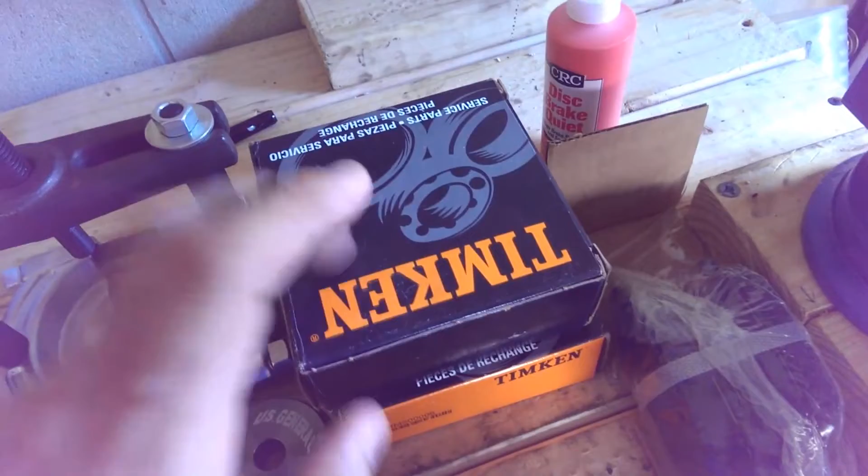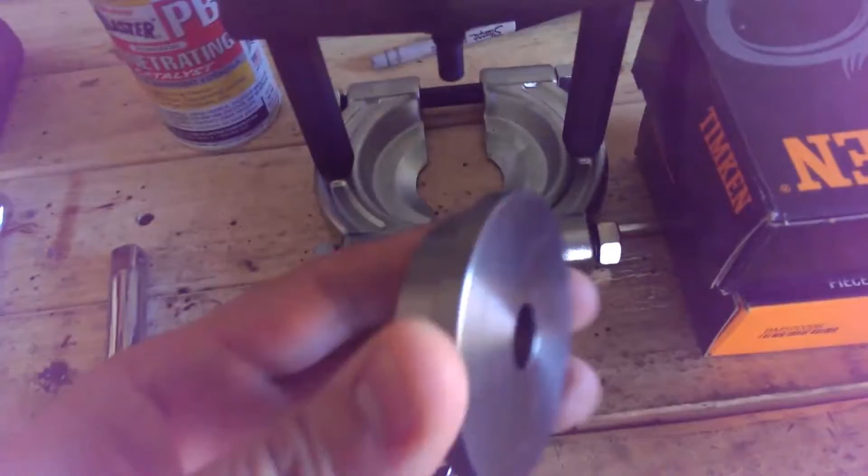I have a couple tools that you will probably need. Obviously brakes, bearings, some disc brake quiet, or any type of fluid you want to use to quiet the brakes. I bought these at Harbor Freight. You have two things: your bearing separator, which is this baby right here, which you can build or buy - I bought it because fuck it, right? I also got these guys, which are basically bearing pushers, which I'm gonna use as a backing plate for the bearings. There's also one more that I need to get from there.

You're gonna need a couple other tools. My friend Joey lent me the torque gun, so this is gonna help me a lot since I don't have one. You're gonna need wrenches and spanners and all that stuff, which I don't have them all here. You're probably gonna need a dead blow hammer or something like that, some wood chocks, and obviously this, which is the manual.

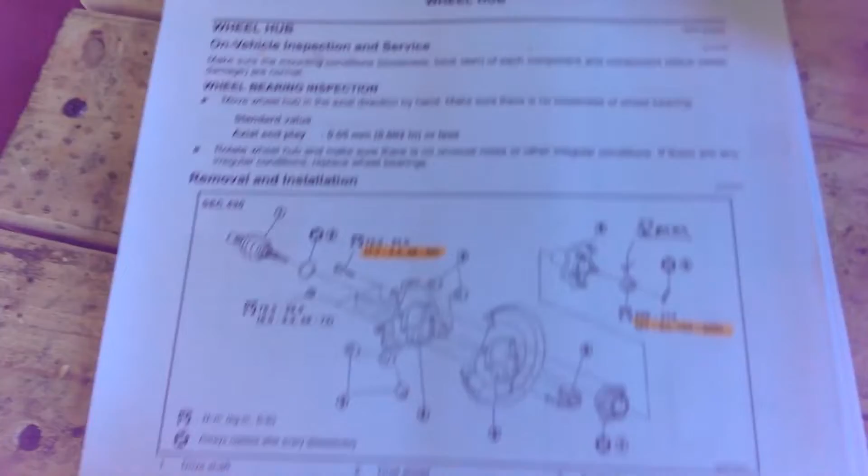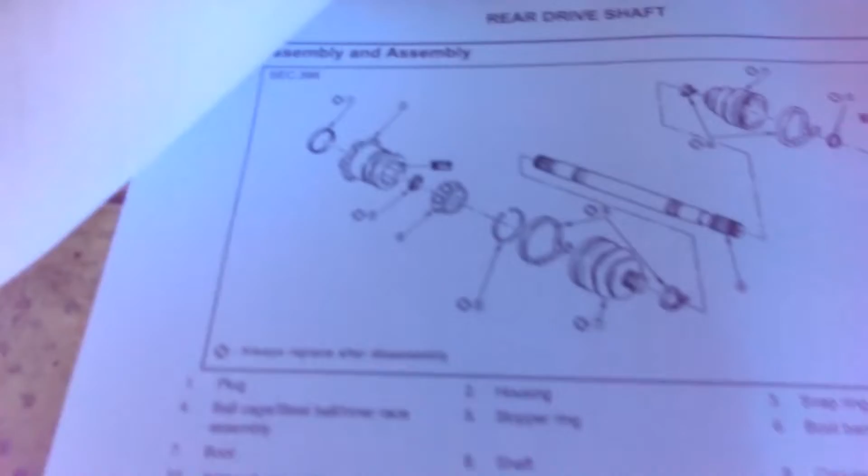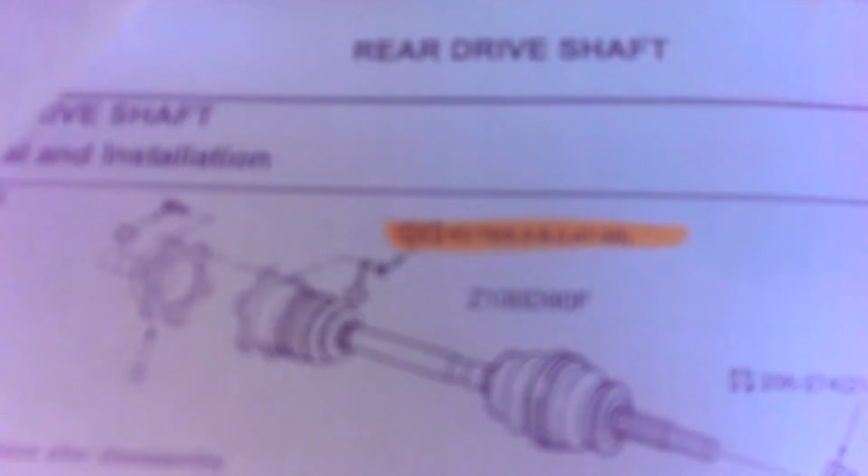This is the R34 section of the manual. It goes from 6, 8, 9, 10, 11. The reason why I got 11 was because in any case I have to look at the rear axle, I have a diagram here showing me how to do that. Same thing here goes with the torque specs for all the bolts. As you can see, those are the ones that connect the diff to the axle.

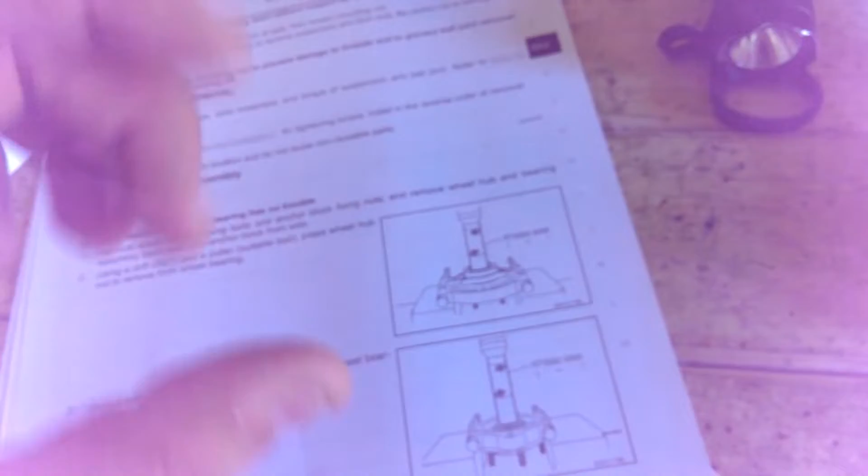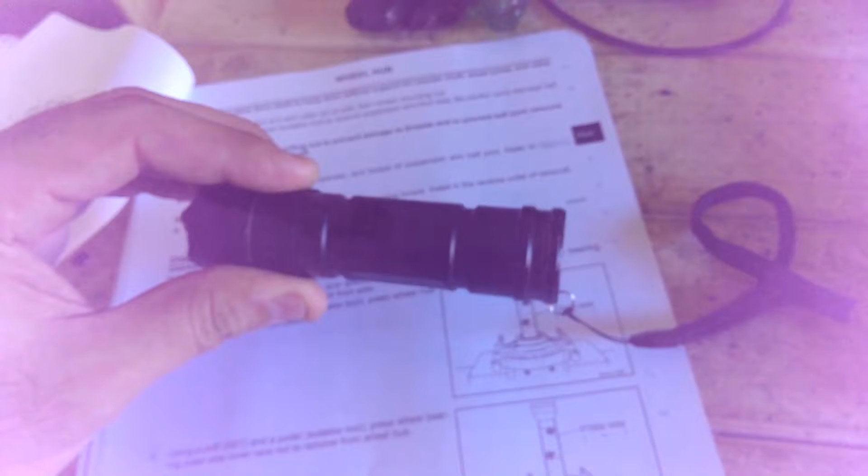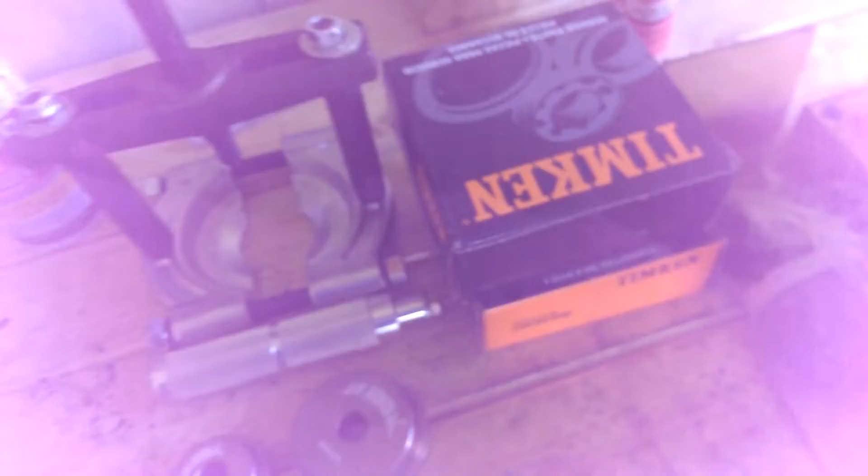So imagine that translated to your tire, or your brakes, or your calipers, etc. Here are the torque specs for the bolts that I'm gonna have to remove. And there's that hub right there. I bought these hubs, the Timkens, off Amazon, which were 54 bucks shipped, which was awesome because all my local stores were charging an arm and a leg for them. So yeah, check Amazon out, it'll probably help you out.

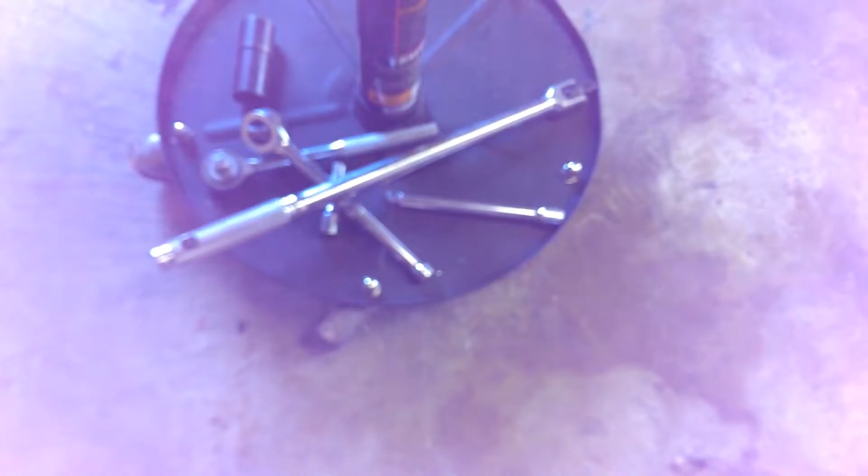You might need, obviously, WD-40, some grease for the axle once you remove it, which I don't have here, but the PB Blaster - this stuff is awesome, or whatever liquid penetrant you have in your area. This is what we have here. These are all my other spanners and wrenches and stuff, and sockets that I have down there.

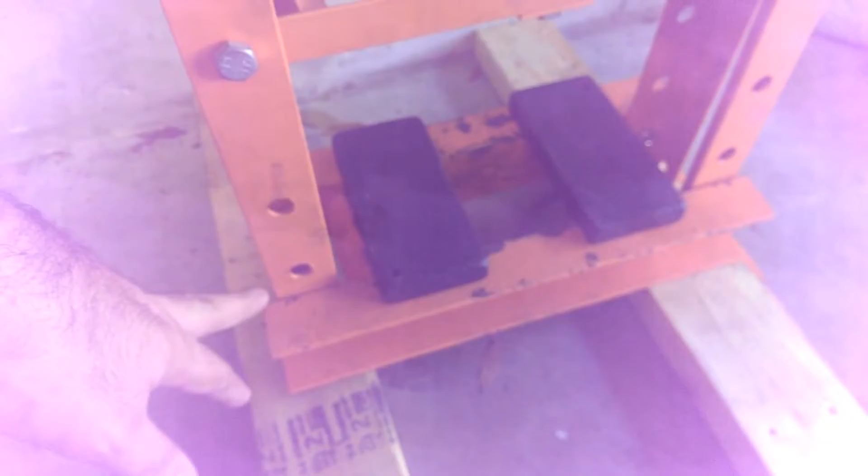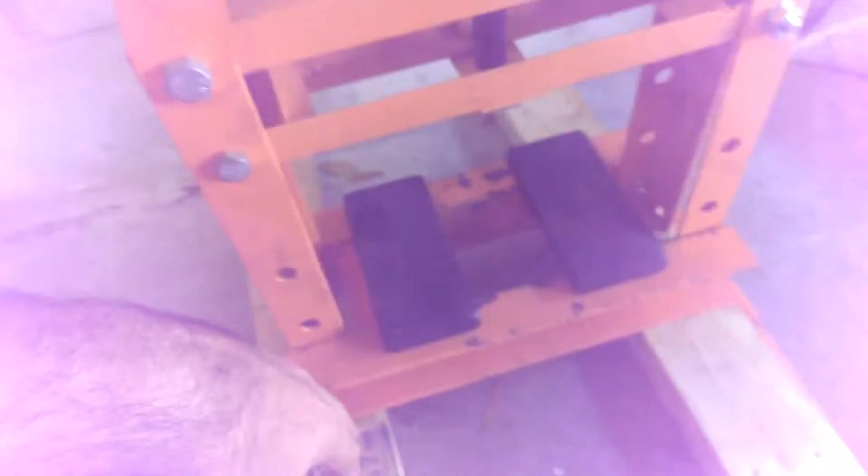I'm going to try using two things. I'm going to try using my press, which I modified a little bit - my Harbor Freight press. I put this bar on the bottom, which I bolted. Normally this bar sits here and you can move it, but I bolted it down there to give me some extra clearance for the hub. I don't know if this will work, but I'm gonna have to try because this is the only press I have. So yeah, we'll see how this goes. If not, I think there may be another way to pull it.

So yeah, these are the other ones that I'm gonna need, which these things are impossible to open. I'm probably gonna need this guy right here because the bearing's about this big. They come with all these, all different sizes and color coded, which is nice, I guess, if you remember the size compared to the color.

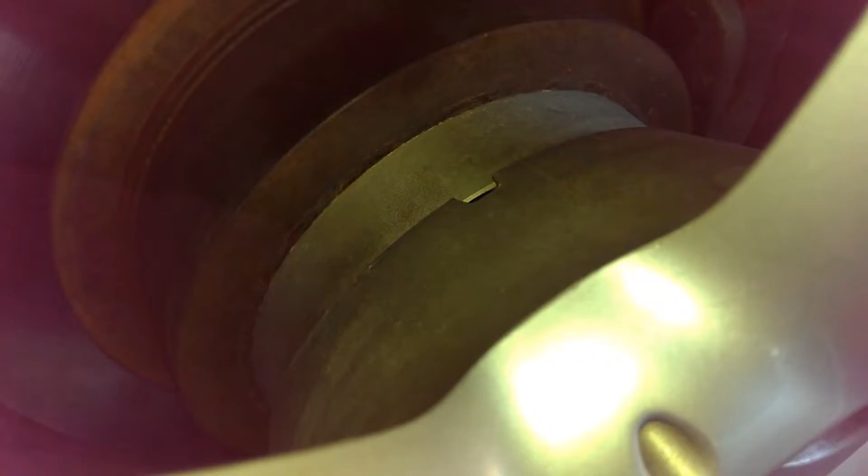But yeah, first things first, we gotta get the car lifted. I'm gonna do the brakes first because I gotta do a brake inspection anyway. We're gonna lift up the car and remove the wheel, and I have spacers on, which I'm gonna turn off - they're right there. So I'm gonna take those off and check my rear brakes, because these haven't been changed since I bought the car almost 3 years ago.

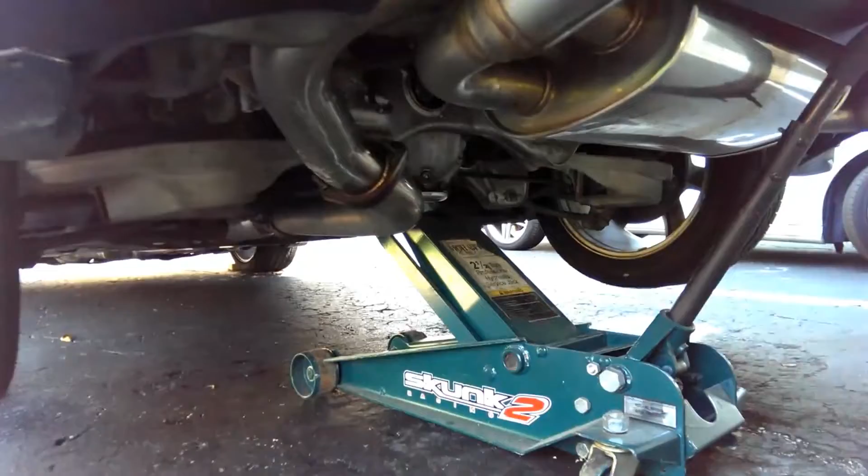So that's probably something I have to take care of. Oh yeah, use jack stands please, because we will be under the car. So use jack stands, okay. I got my jack there with all my stuff. So I'm gonna go ahead and jack up the car, and we'll start from there - basically lift the car up using the pumpkin as a lift point, or that's how I did it in my case.

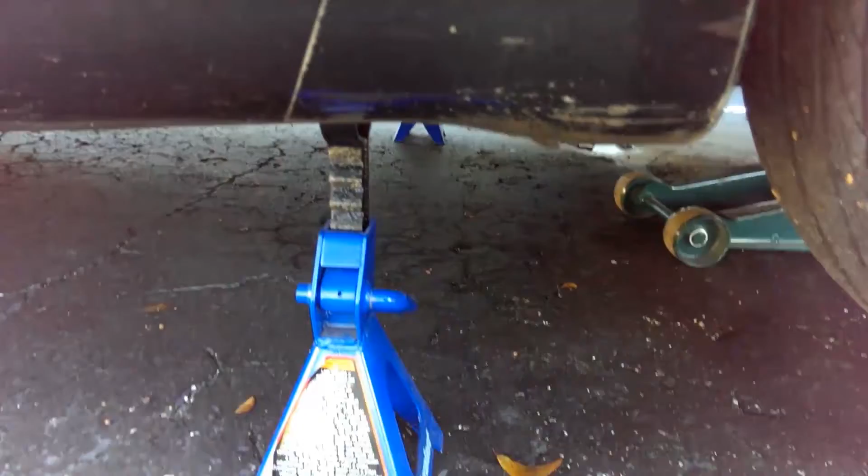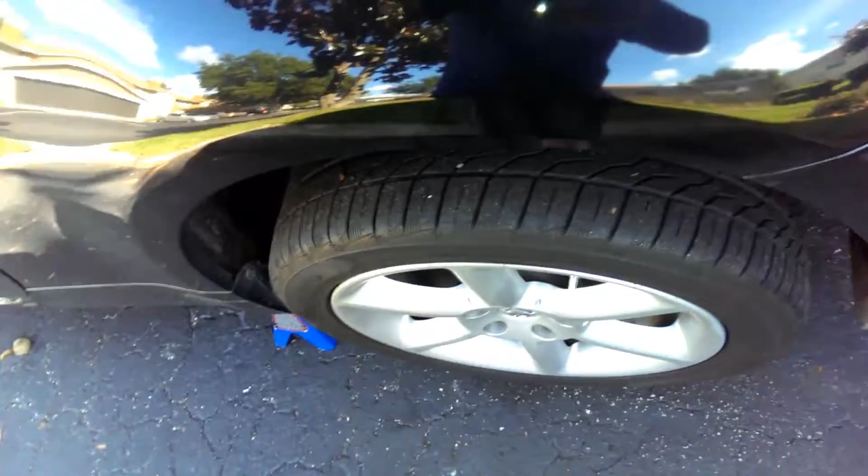Put the jack stand in that pinch weld right there, and one on the other side. I personally like doing the push test, to make sure it doesn't move. I'm gonna leave the jacks down there right now since I'm not gonna be under the car.

Let's take off the wheels. I already loosened them up while they were on the floor, it's easier that way.

With the tire off, you're gonna have to remove the brake caliper, which is removed by these two bolts, one on this side. This sits like that, right? That's a brake pad, one sits like that, one on the bottom.

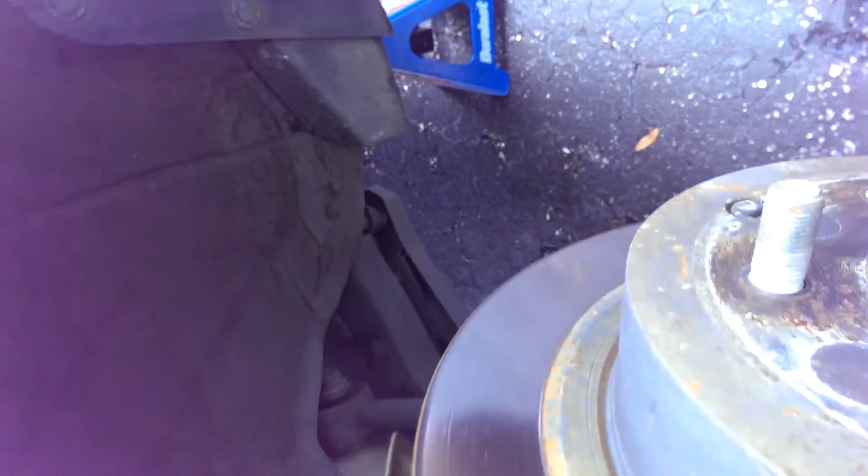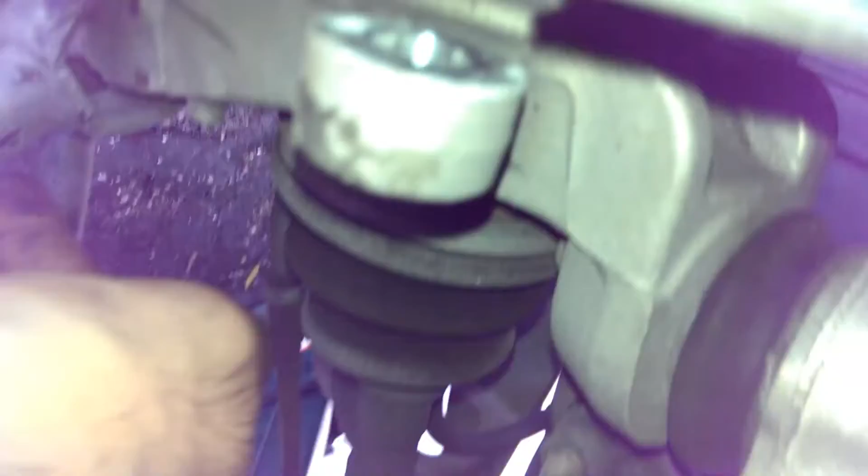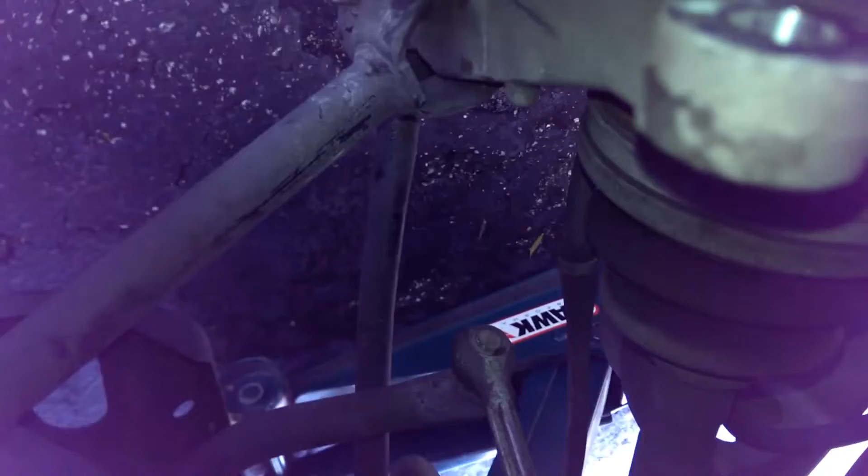Those are, I believe, 19mm bolts. One goes right here and the other goes here on the bottom. You will have to use a breaker bar to do it. I found out the best way is to put the socket here, then the breaker bar through these two arms, and break it this way. Same thing with this one, because if you put the bar up here aiming this way, you're probably going to hit your knuckle against this and not have a good day. I'm speaking from experience.

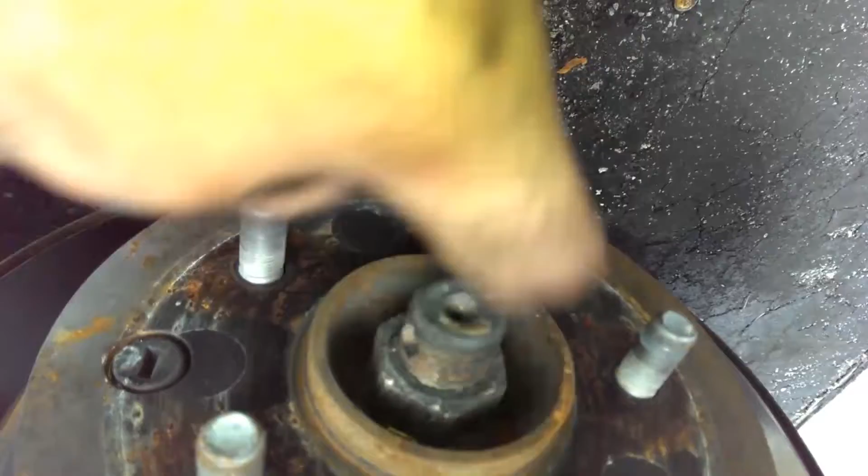Take the calipers off and take the pin out of here. You're going to have to replace this, so get a new one. This, I believe, is a 32mm socket that's needed, which I don't have. I must have lent it to somebody or lost it, so I'm gonna have to go to the store right now and pick one up.

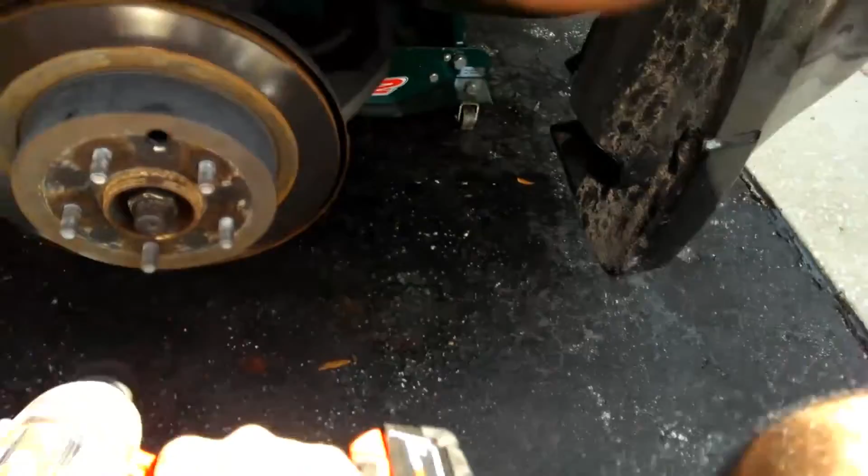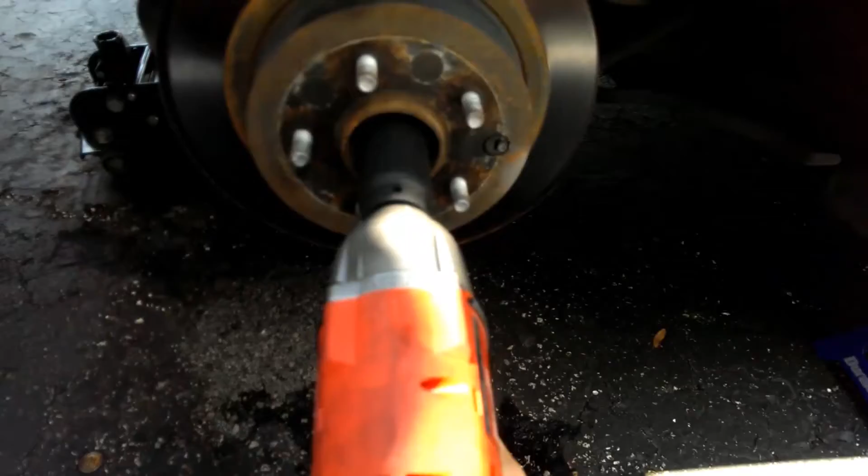Damn, I have got to get me one of these. This thing just saved 5 years off my back. Woo! Damn. Thank you, Joey. This thing's awesome.

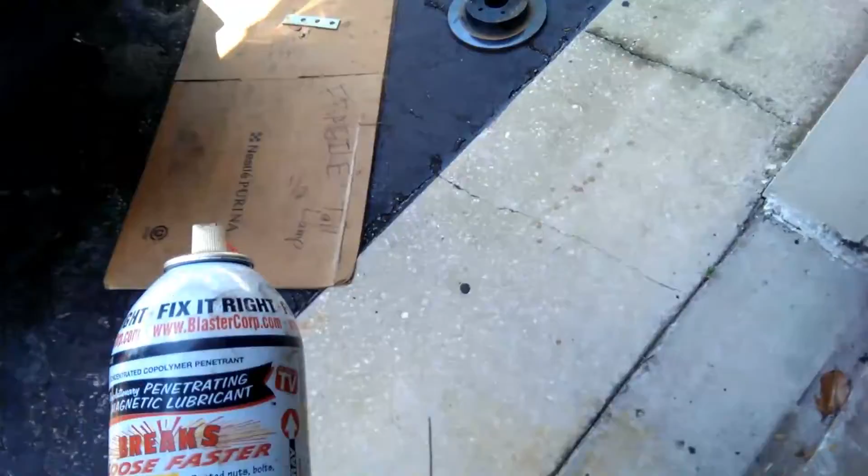I'm gonna go get my hammer and take a couple whacks at it, see if I can take this bad boy off. This is where this stuff really comes in handy. It took me about 20 minutes to kick out, and took me 5 minutes with this.

Spray it basically, and when you have the rotor in, make sure your e-brake is off first. Yeah, that's a fairly common issue with this, everybody just puts the e-brake on and forgets to take it off, so this becomes impossible to remove.

Then put PB Blaster on these bolts from the outside of the rotor and in here, just for later, because this is going to have to be removed, at least the axle-wise. So do that, spray it, give it about 10 minutes, and then start hitting it with a hammer.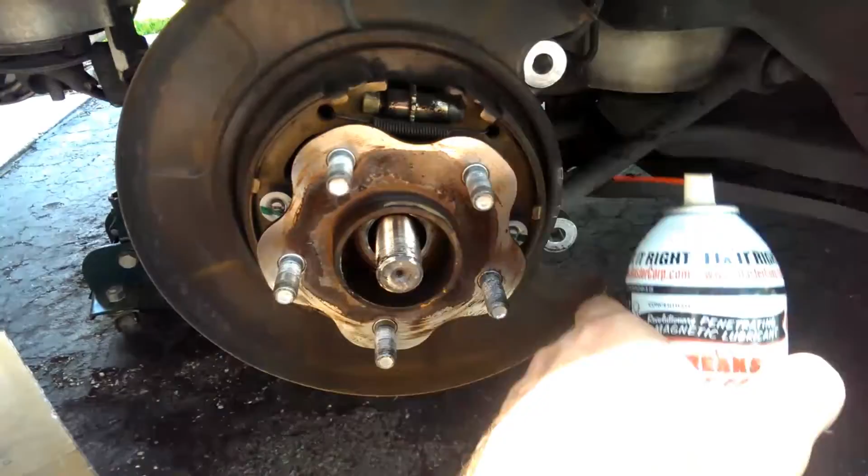Basically, if this is my hammer, I come behind here and hit it this way, rotate it, hit it, rotate, hit, and do that. What happens is the rotor will little by little loosen as you're hitting it. You take a flathead screwdriver and put it in here, in those things, and use that as leverage to move the rotor out of the way.

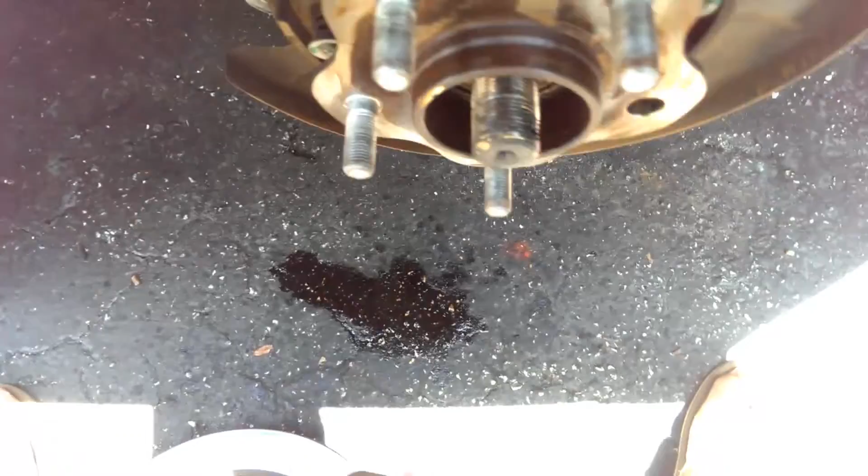As you see on this side, I've already gone ahead and removed it. By mistake I knocked one of the bolts out, which should be right there, so I'm gonna take it out and install it, because obviously I need that bolt. Let's get to it.

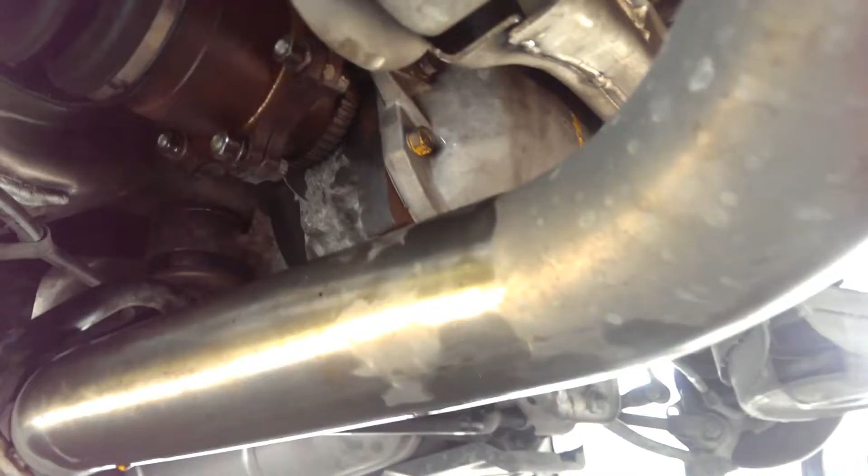After you get the brakes and calipers and all that removed, you need to loosen the 6 axle bolts on each side. Now mine I already loosened because they're about, I think, 70 or 79 foot-pounds. I gotta double check, but yeah, they're pretty tight.

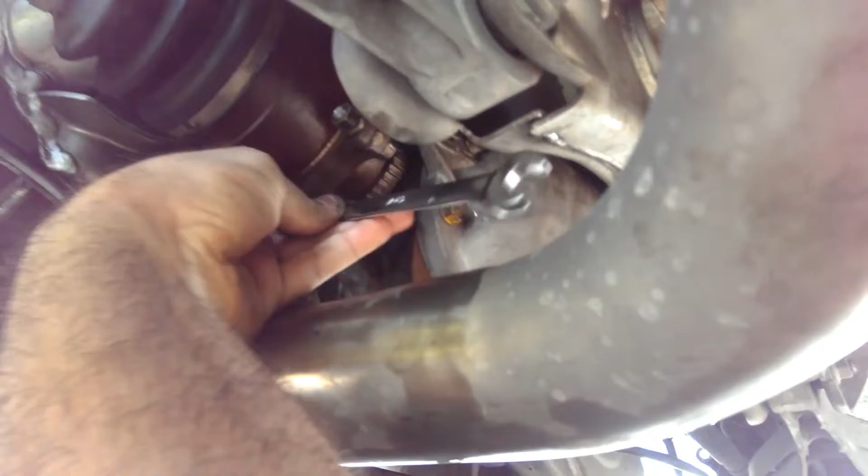If you haven't watched my diff video, basically what you do is take a 14 millimeter and rest it against the back end of the bolt, then with this one put it on here and use that to turn, because this axle will move. Instead of having to go out, press the e-brake, turn it, remove the e-brake, and do that like 12 times since there's 6 on each side, just do that and it'll save you a ton of time and back problems.

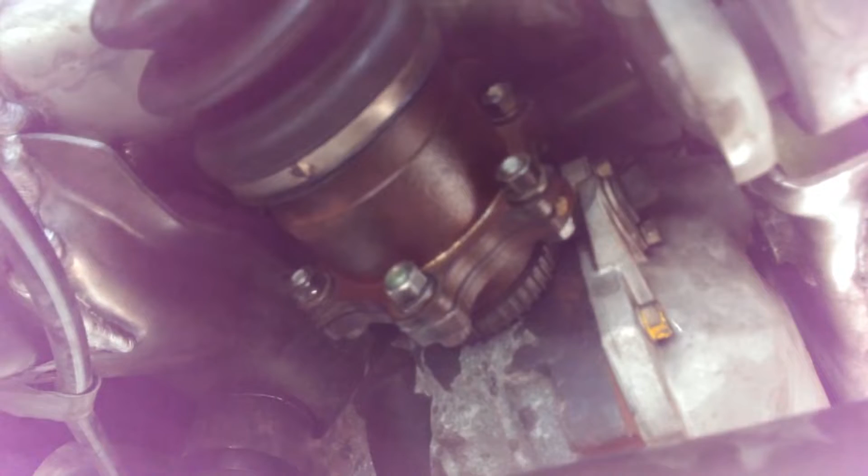That way you only have to get under the car once and not 12 times, at least for this. Alright, after this I'm gonna go take a little break because I'm starving and need rocket fuel. I'll get back with this.

After this, basically just remove this axle and remove the bolts, slide it down, and then slide it out. That's about it.

You're gonna have to remove the rear stabilizer bar linkage, and you don't have to remove the bar, just lift it up like that. That way you have enough clearance here to push the axle out. Now you can see, or you can hear actually.

It's not supposed to really sound like that. It's all gritty and it spins.

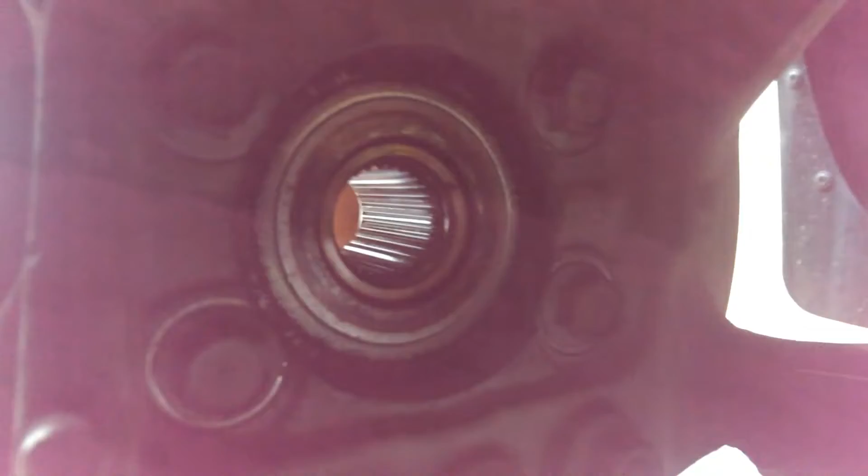So that's gonna get knocked out. Basically what you do, if I can try to film it, right behind here there's 4 bolts. I'm sure you can see them. Let me turn on the light. You're gonna have to remove those first, and then this basically gets pushed out this way, pulled out, I mean.

And that's it, you can see them right there, 1, 2, 3, 4. I'm gonna put some WD, some PB Blaster on this, and be back in like 20 minutes so I can knock this guy out. After you loosen those 4 bolts using your breaker bar and the 17 millimeter over here...

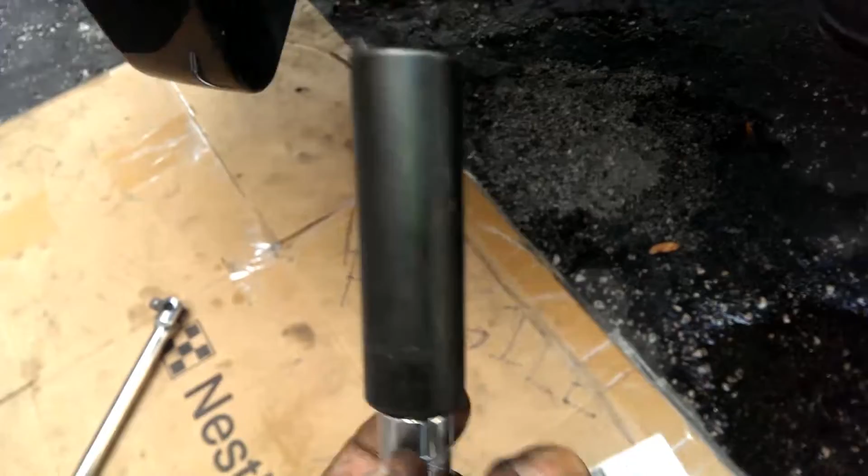What you're gonna do, the easiest way to do it is that you go underneath the car and you put the breaker bar like this, and you do it from the bottom, you ratchet it from the bottom. It's a lot easier and it'll save your hand from hitting this. All you have to do is break it, and then once you break it, you can use just a regular socket and then just ratchet.

I'm sorry, I'm kind of tired. You use a regular ratchet to remove those 4 bolts in the back.

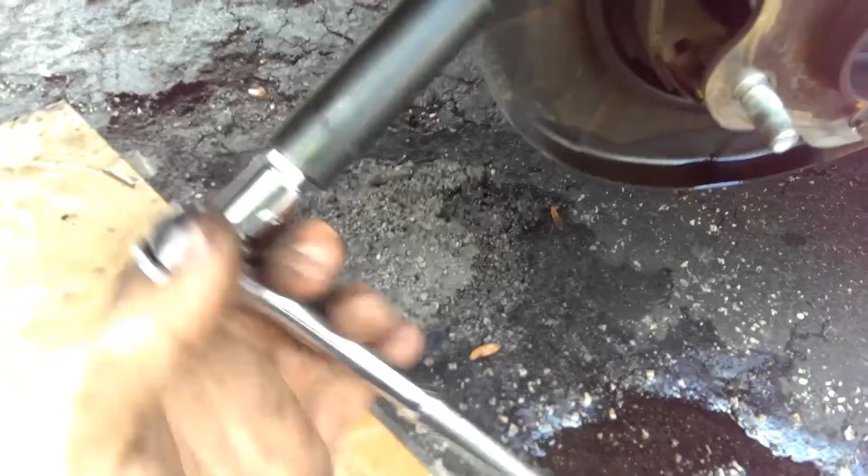Afterwards, which I'm going to show you, take a rubber mallet and you start tapping it, the bearing around, that way it knocks it out. By the way, use plenty of PB Blaster on this guy. They're really tight on there, and they're probably rusted.

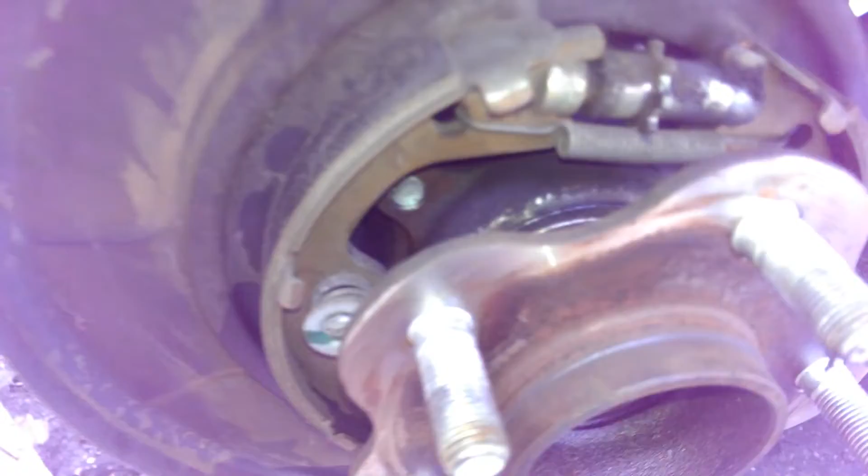If you see mine, look how dirty that is. So you're gonna have to use plenty of it. I put it on and I just went home to relax a little bit for like 10 minutes while it did its thing, and I came back. These things came right out.

All right, bolts are out, see them? So start tapping it like that.

You see it starts to show up a little bit. See it from the bottom.

Well, I can't do this with one hand, so I'm gonna have to stop recording, but basically you just do that so that way that little part around there shows up, and then that's it. You just pull it out.

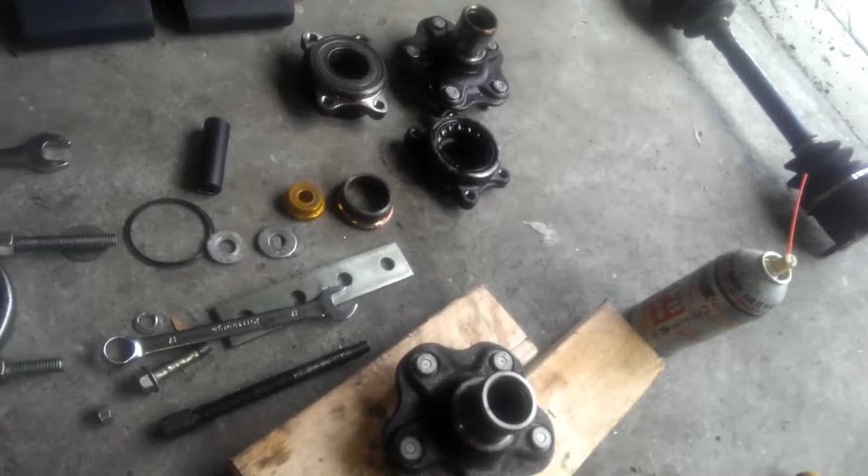After an hour and a half dealing with this, sorry I couldn't film it, but I had my hands really tied up. So for those of you who are gonna buy this from Harbor Freight, don't. This thing right here is a piece of crap.

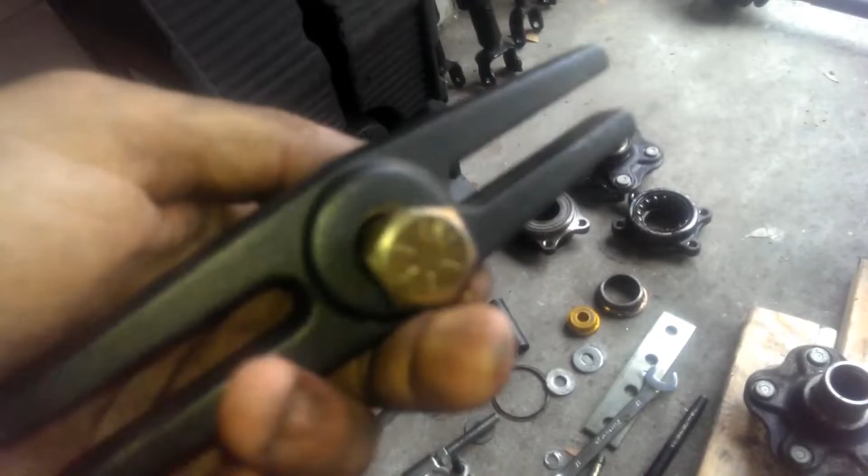The threads already broke off. Now from here, this bolt is actually surprisingly still holding up. This though is a piece of shit.

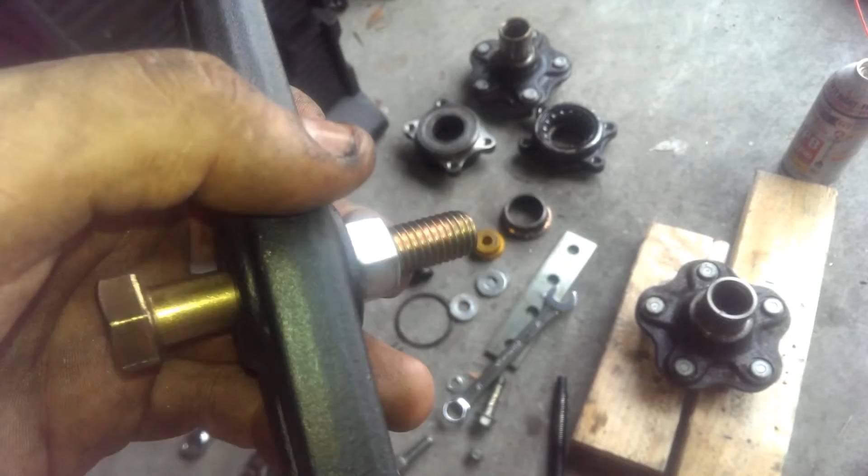The thread's already broke, so I had some grade 8 bolts over here, which I used to press little by little the collar out.

And even with this retaining tool, the bearing still broke. Look at all that junk in there.

Yeah, it's really dirty and grimy, and there's a bunch of crap in there, and I think the seal may have been broken at some point. But yeah, there's a lot of metal in there.

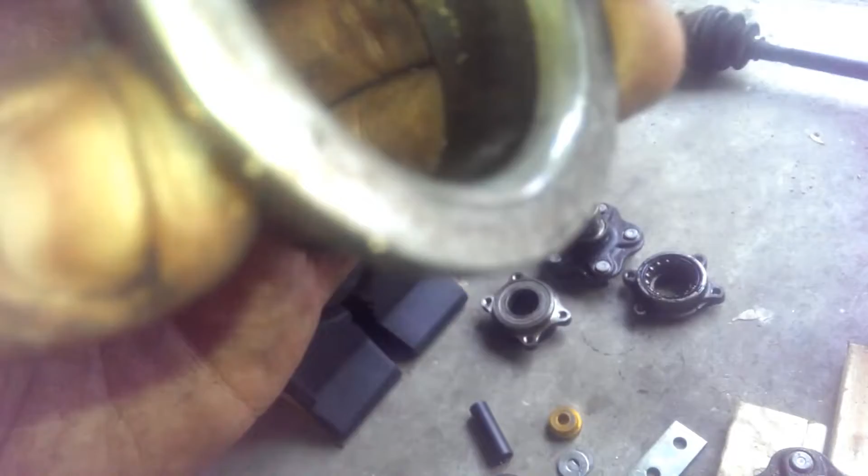And here's a collar. Chances are that this part will break on you, but you know what, that doesn't matter because I got it off.

The whole point is that this collar right here stays intact. This is what you don't want to damage, or the teeth inside. Those hubs can go to hell for all I care. So Jesus...

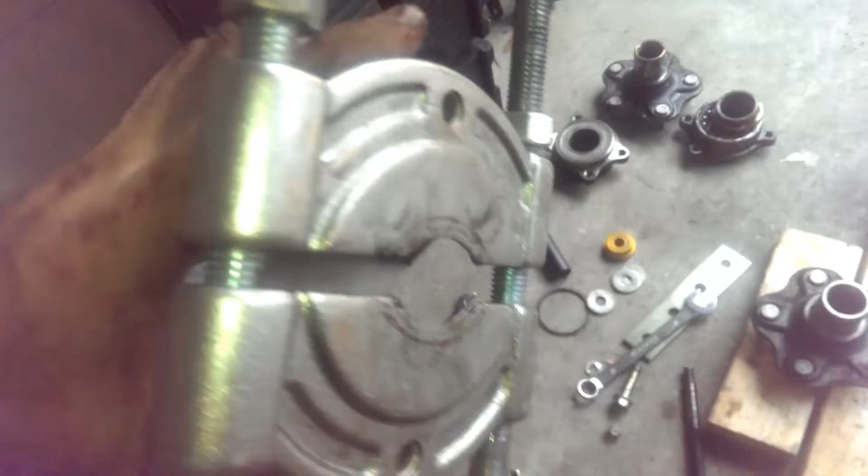These bolts also weren't long enough, so I had to get 2 of these Home Depot bolts I had, which as you can see are completely and utterly bent, but I don't care because they were 40 cents a pop.

So anyway, I'm gonna return this because I'm not gonna have a tool that's half-assed and half broken with this piece of junk. So yeah, this is getting returned, and I'm gonna look for something else, at least for now, but at least I got the job done with it. That's all I care.

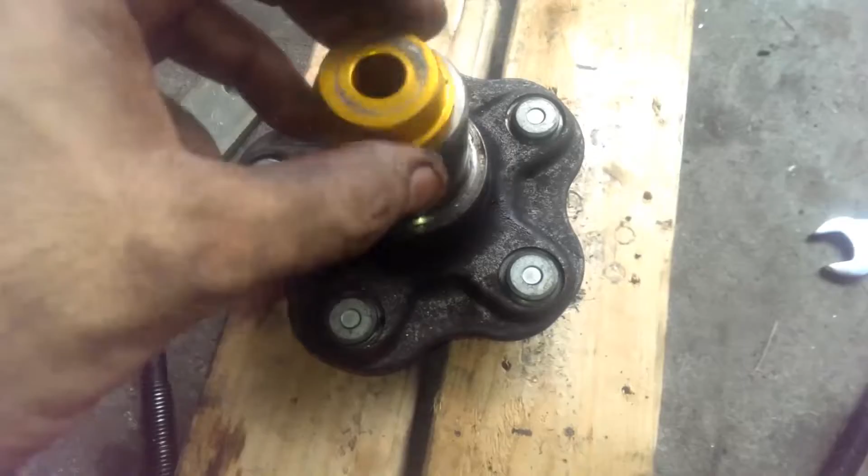So anyway, more or less what you do is that once you have to put this little spacer thing here, that way it pushes down. Once you put this vise, basically you're gonna put this between the bearing like this on the bottom so it holds it, and then when you press it, this is gonna lift supposedly the whole bearing up.

But in my case, maybe I used the wrong one, or maybe I should have bought the larger one, because the larger one supposedly it's sturdier, but it doesn't come with these, and I needed them. So in this case, I didn't give a shit.

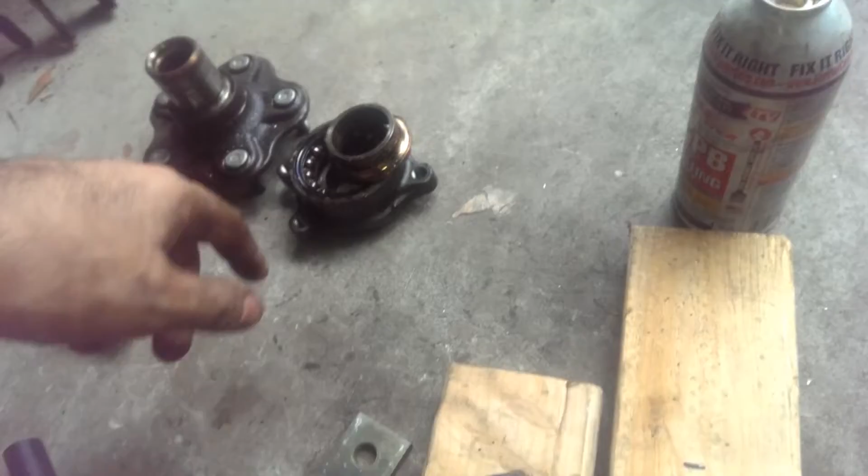It'll clamp on this bearing on the bottom and pull it all up. This was really rusty, and it could be a combination of both rust and me using the improper tool. But in this case it doesn't matter. The spline wasn't damaged. The bearing's damaged, but it's going in the garbage anyway.

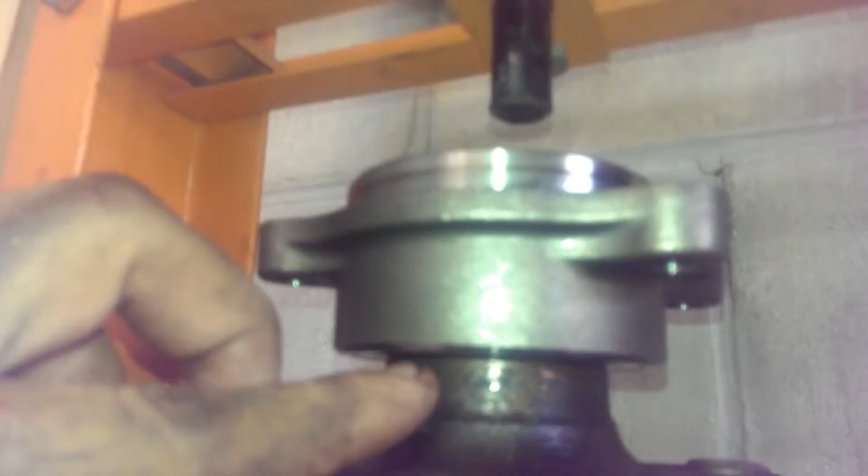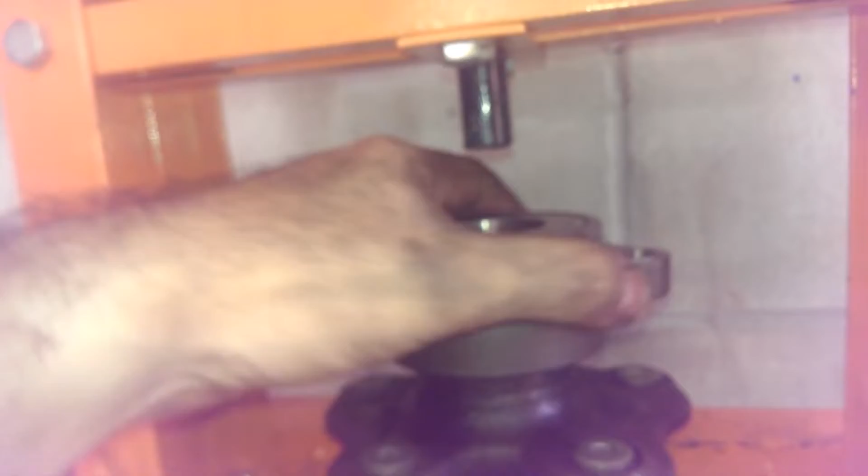That's sitting flush, so just watch it that way. Now look at the difference between this movement and the one on the other side. This is much more solid and everything.

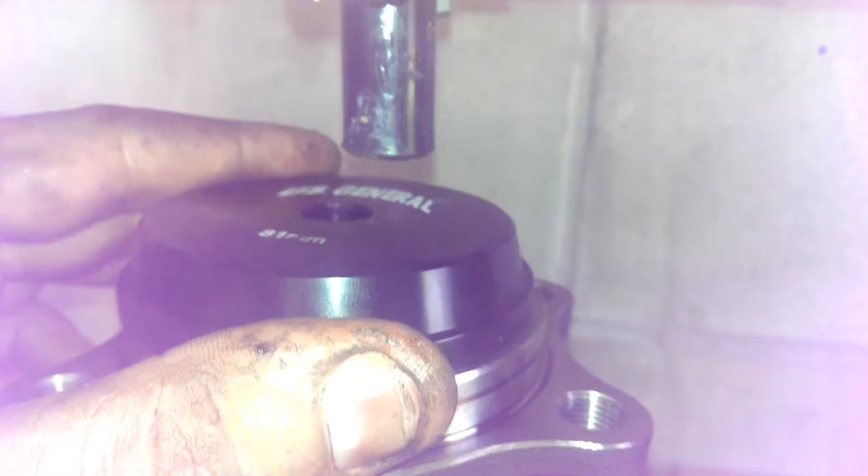So I use the bigger 81 millimeter bearing pusher, which I will keep because these things are awesome. It sits right there on the lip. Make sure you get one that sits all the way on the lip of the bearing, not like that, because then you'll push the inner bearing out. It has to sit all the way flush like that. Make sure it sits flush, and make sure the lip around here is pretty much even, which it is.

And yeah, there you go. You got one new bearing. Bam.

Unfortunately I have to use both hands, and I don't have a tripod for my phone, so I'm trying to describe it to you as best as I can.

I put a little bit of moly grease on here and on the new bearing, like there. Very little, not a lot, just very little. I cleaned it with some cleaner, in this case I had the electric cleaner because I ran out of parts cleaner, but it'll do the trick. Just make sure it's nice and clean. As you see, there are no scratches or marks or scuff marks, anything from the removal.

So go ahead and do the other one. The bearing there, so I'm going to try to show you while it's being pushed down. The camera's going to move a little bit.

Sorry, it's just trying to... There, just a little bit for snug, and that's about it.

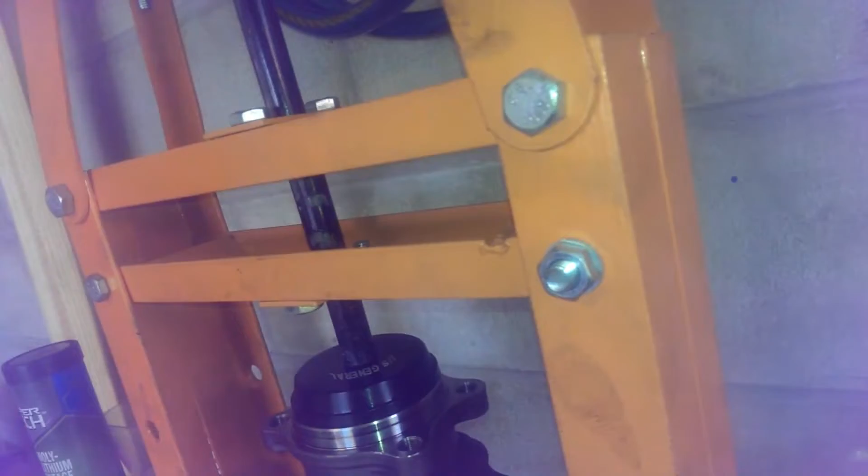Brand new bearing pushed in. As you see, the same thing on this side. Everything's even, which is what you're looking for. Right there, on the lip and top lip. That's the most important thing. Okay, so yeah, there you go.

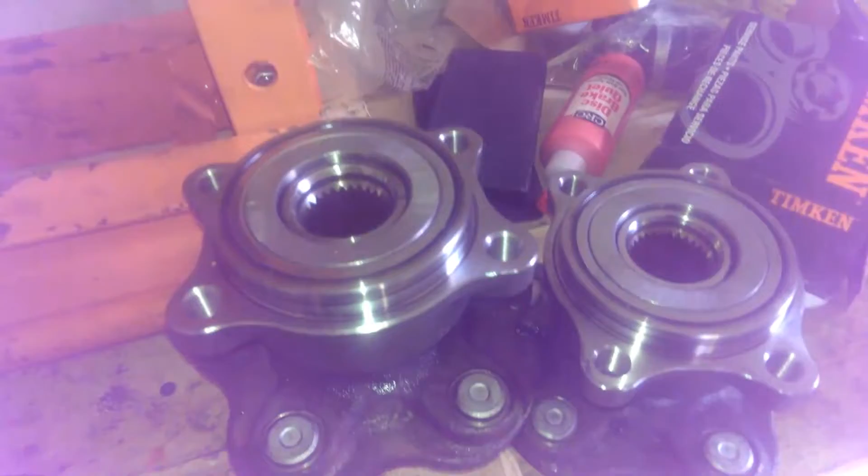Now you're done. It's basically reverse order of installation. These are the new bearings and the old ones. As you see, the old ones have, let me see if I can focus it, a bunch of metal and grime and dirt in there, so I'm guessing at some point the seal failed.

And from what I see right here, that's the grease. You see all the metal particles in there, so yeah, they're bad. Same thing with this one, you see the metal particles in there. So the bearing wasn't per se busted, it's not like it was vibrating a lot.

But that noise is horrible, and eventually this would have gone, so I'd rather do it now than after, when it could screw up the diff or anything like that.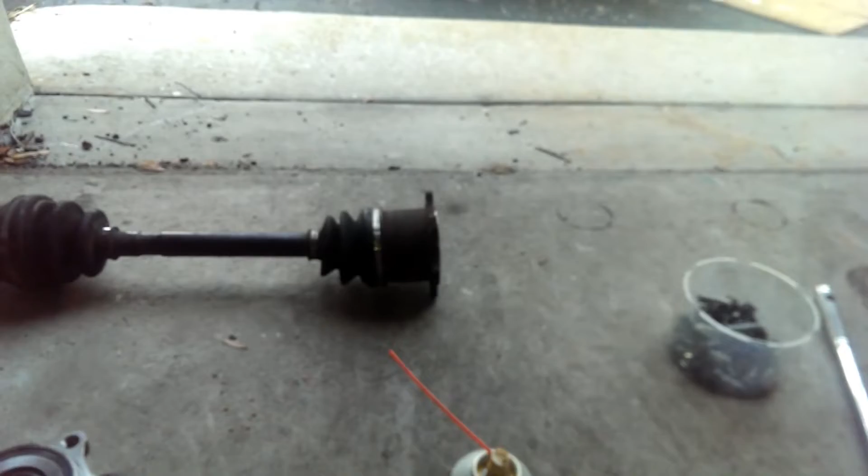Right now I'm going to go back and reinstall these and basically start from, well, basically all it is: mount these back up, put the axles in, put the axle bolts in, put the brake calipers on, and tighten everything up to torque, which I'm going to show you now. So let's get to it.

Now the new one's mounted. You see that I have the bolts in already, they're not tight, they're just in there. See that? That's how it's supposed to sound. No noise.

Okay, if you notice, there's absolutely no play, so everything is perfectly aligned. Ready? Same thing on the other side. Now I'm gonna show you how much torque you have to apply.

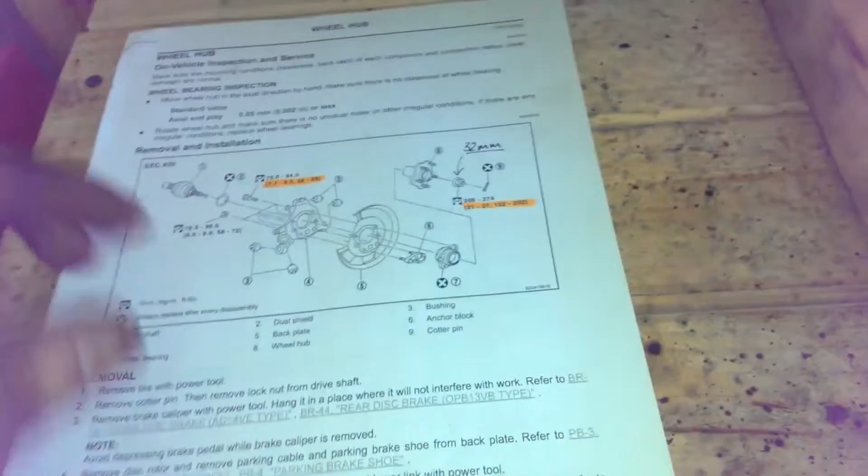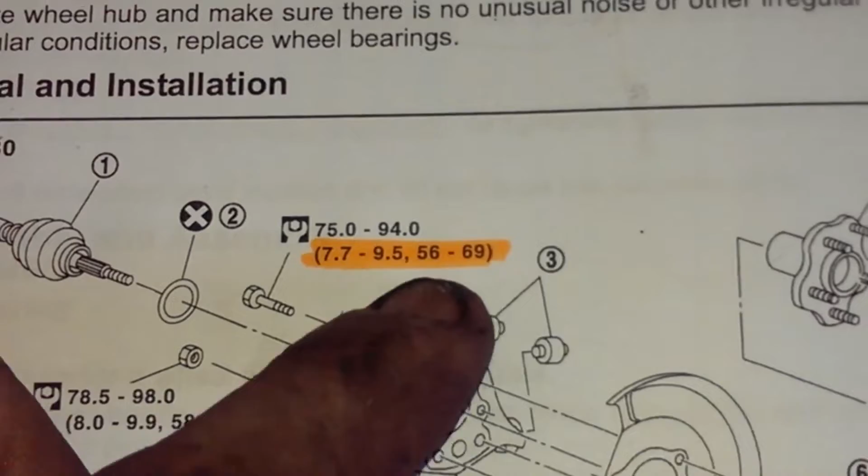Sorry, I still have a mess here from the press. Let me see if I can... there it goes. It's basically 56 to 69 foot-pounds. You notice foot-pounds, so you need to get a torque wrench for this.

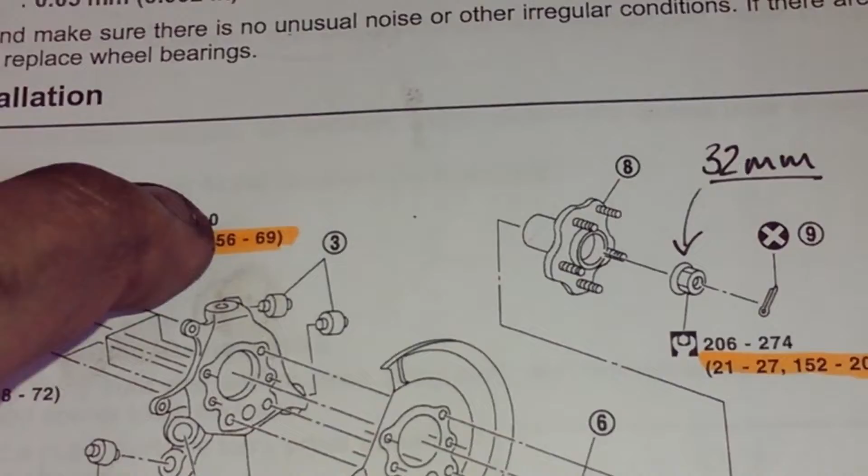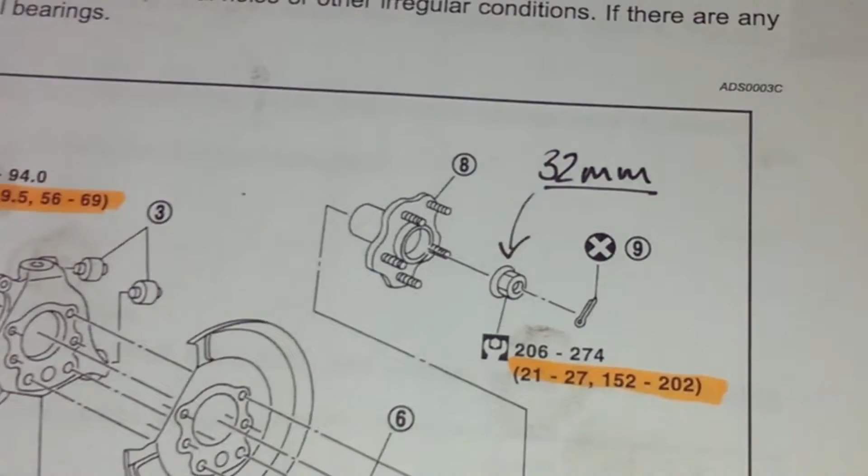The nut for the axle is 152 to 202 pounds, and you need to use a new cotter pin for this. I have a bunch, so I'm gonna see if I should use one that's the same girth. Yeah, start doing that.

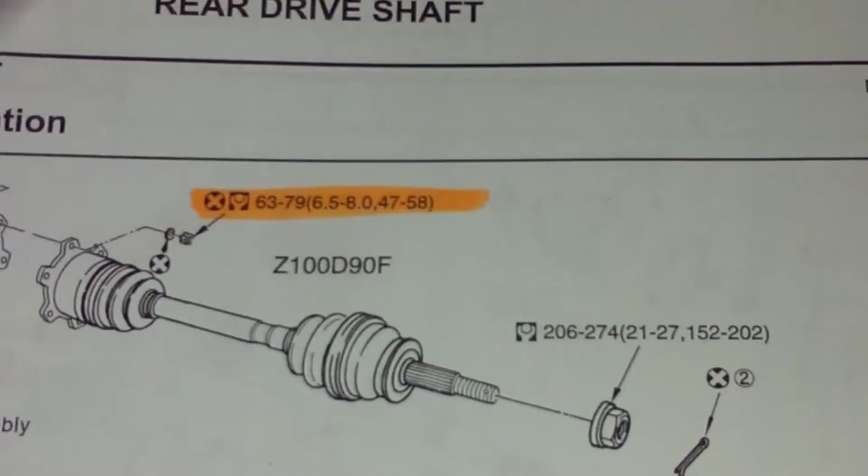Now for the axle bolts, right here, it's 47 to 58 pounds. I usually split the difference and get in between that. So I'm gonna start taking out the torque wrench and doing all that.

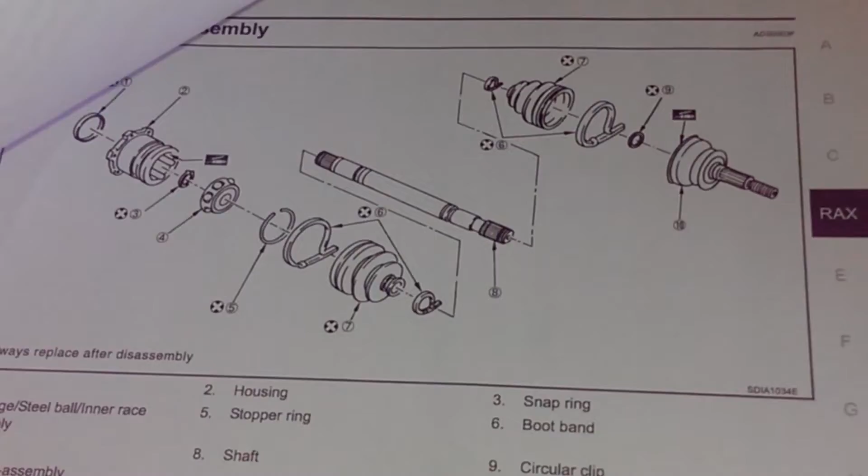Again, these are pages RAX6 all the way to RAX11. Pardon me, I'm kind of tired and it's hot as shit out right now, so I'm a little bit dehydrated. So let's get to this.

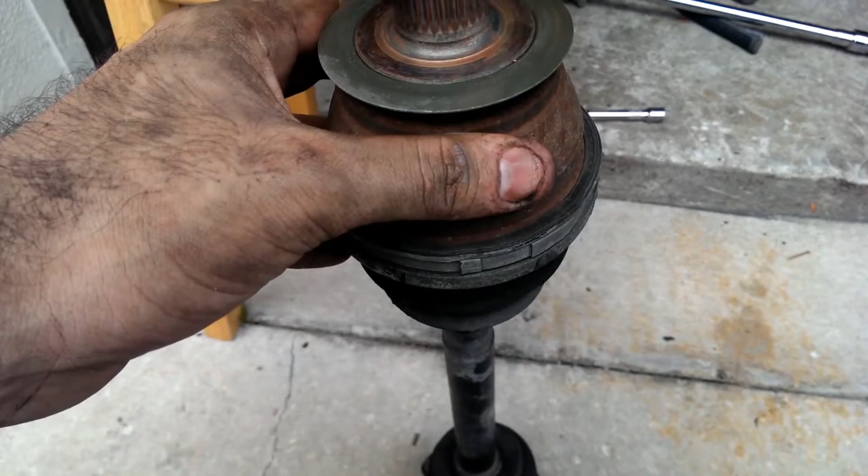I already torqued the bearings to spec, which from the last video you saw where it is. I can't remember the number right now, but anyway, now we're gonna apply grease on this. As you see, Nissan's supposed to put grease on this so you don't get the classic ticking axle syndrome.

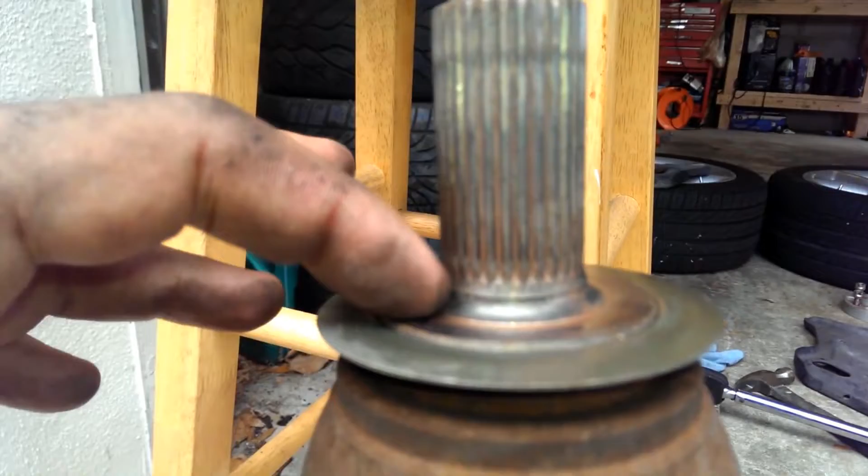This didn't have any grease, so I'm gonna go ahead and add some moly-lithium grease here, not a lot, just in the back, something like that. Add it to both axles before you put them in, and don't put any here, you don't need it. If you want, you can add a little bit here, but it's not really needed. I'll grease this up a little bit and add the majority down here.

All right, so I'm gonna go ahead and do that and then pop this axle back in. I already went ahead and mounted both of the discs. These can be a bit of a pain in the ass, especially if you by mistake move the e-brake.

I just started, I didn't have the manual here, so I just tried to align it as best as I could, and I slipped them both back on. But just so you know, be very careful when you remove these. Don't move the inner emergency brake assembly, because it gets very bitchy, let's just say.

Let me see if the camera can handle this, because it's really bright out here. Alright, so right now I'm going to do the brakes. I got my new Hawk pads here, they're significantly thicker than the ones I had. The ones I had were still not bad, but I decided to swap them anyway.

So for that, basically, I still have the brackets separated. Right now what I'm gonna do is just use a C clamp, this is a 4-inch C clamp, and slowly push in the cylinder, just very slowly. It'll go in, see, it's working itself back in. Just do that on both ends, it'll go in just very gently.

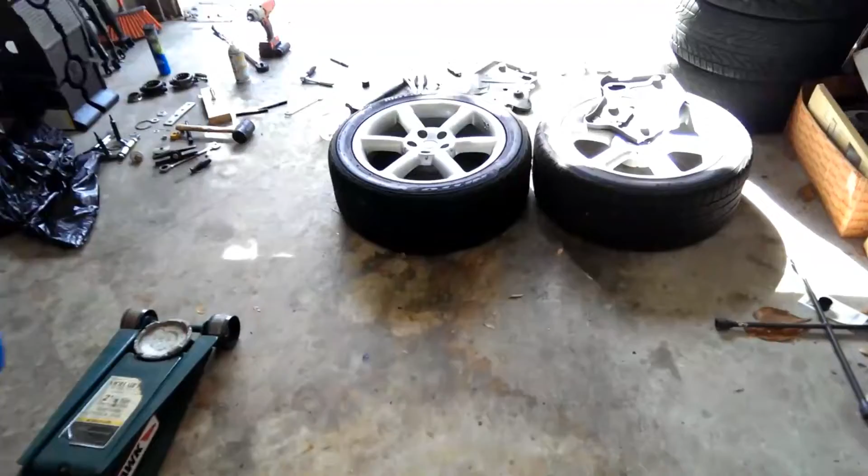Alright, so I only got a couple things left. I got those 2 panels to put on, the tires, the new brakes are installed. Sorry I couldn't film much, it's really hot, so I gotta get this done before work.

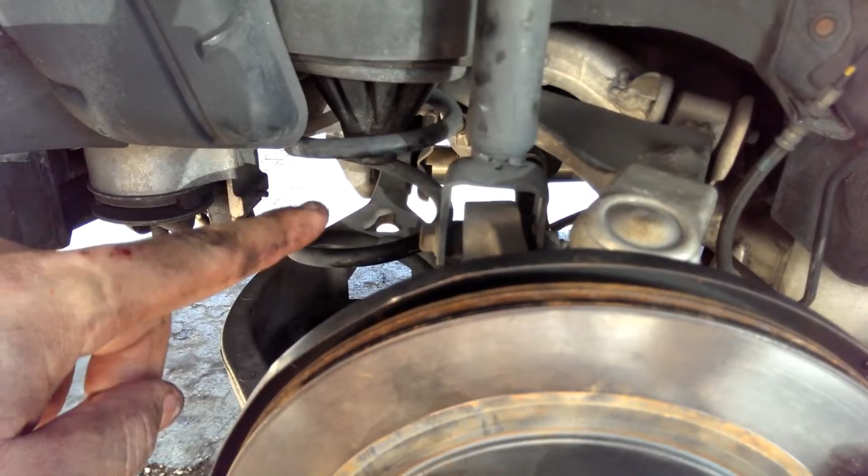So I got the spacers mounted, I gotta torque them. Make sure you torque these 2 bolts, the ones on the bottom, the bolts on the axle, make sure those were torqued, which they were. Make sure that the bolts at the end of the axle, the 6 bolts, were torqued. Make sure that the control arm bolts are torqued also.

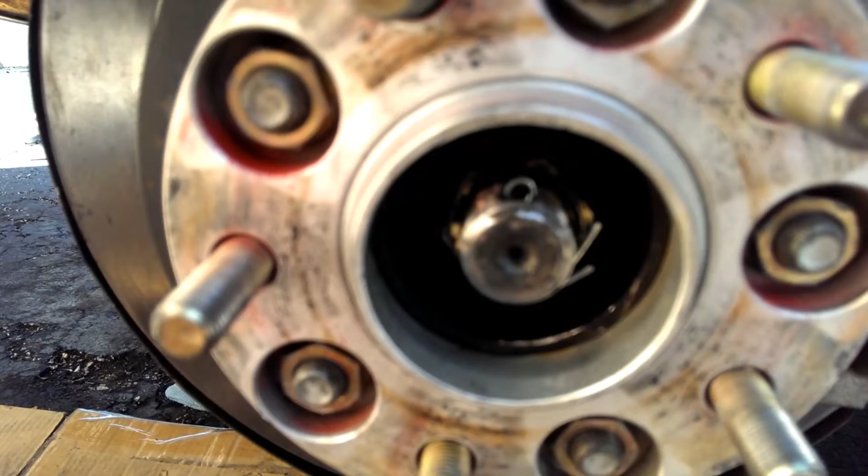That's about it, oh, and yeah, put a new cotter pin and make sure this is torqued. It says between 180 and 200 pounds, so I put it at about 190. What I usually do also is after about 50 miles of driving, I lift up the car again and recheck the torque on every bolt, just to make sure.

So yeah, there are the new brake pads, the Hawk ones. Right now I have the e-brake on, so this thing's locked up tight, which you have to do in order to tighten this. So again, my suggestion is that if you ever think about tackling this...

Have a torque gun over there. Can't see it because it's too bright, but anyway, have a torque gun, either pneumatic or electric, with enough torque. That's a Milwaukee, I don't know what model, but it's a pretty good one. It snapped this guy right off without a problem, same thing with the axle bolts and the bearing and everything, it just knocked it right out.

So yeah, just put the wheels on and take it for a spin. I'm gonna take a video after I shower, because I'm nasty right now. But yeah, go take a drive and enjoy your new wheel bearings. See you next time.